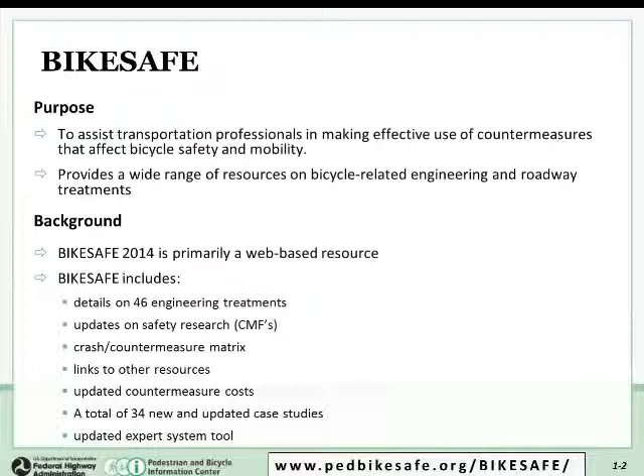So I'll pause here for a second so people have a chance to look at the slide. This covers the purpose that I was discussing about the BIKESAFE guide, and then the 4 different sections. The final section includes case studies to really show the real-world implementation of these countermeasures.

As I mentioned, this is an update of the original BIKESAFE guide, so it includes information on the latest guidelines, and then links to dozens of other helpful web resources. It's intended to be a portal to give you an overview and information on some countermeasures that may be appropriate, and then guide you to other sources of information that may be helpful for selecting that specific countermeasure.

The idea is it's based on best engineering practices, but it's not necessarily a comprehensive list of countermeasures, since the design field is constantly evolving.

There's a couple of companion pieces that we link to throughout the guide that are updated periodically as well. One is information on the safety research for these countermeasures, which is intended to be periodically updated as new research is released. The other piece is a study on how much these countermeasures cost - surveys were done across 40 different states to get a general feel for the cost of these different countermeasures, and that's included with the countermeasure information.

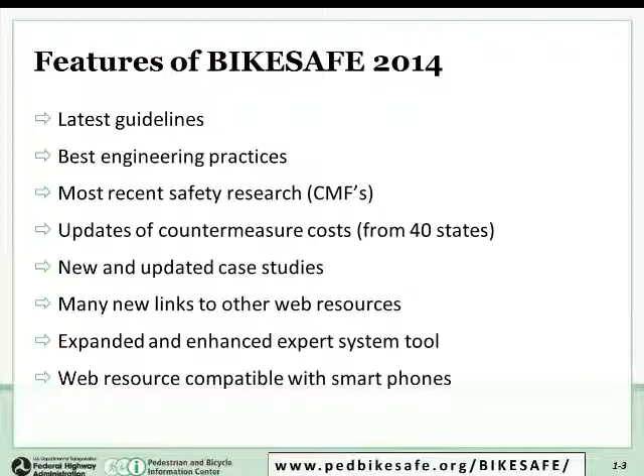So with that and with the background, I turn over to Pete, who will start giving some further information on the first section of BIKESAFE, which is the introduction and background.

Okay, thanks Carl. I assume everyone can hear me. BIKESAFE has a lot of good information in the background, and I'm not going to begin to cover it all, so I'm going to just have 4 slides here that introduce you to the kind of information you'll be able to find in the introduction to BIKESAFE.

First is that everything with BIKESAFE starts and ends with a focus on safety, obviously with safety right in the name, and you'll see that theme throughout, whether we're talking about prioritization or trying to solve different problems. It really always gets back to safety.

This fits in very nicely with some of the other national trends, not only a focus on safety, but really focused on changed outcomes. In other words, we want to be smart about how we spend our time and money and really start reducing both the number of crashes and the severity of crashes. It's also consistent with the new focus on accountability and transparency - why we're doing what we're doing. So it really fits in very nicely with what we're seeing nationally in a lot of communities.

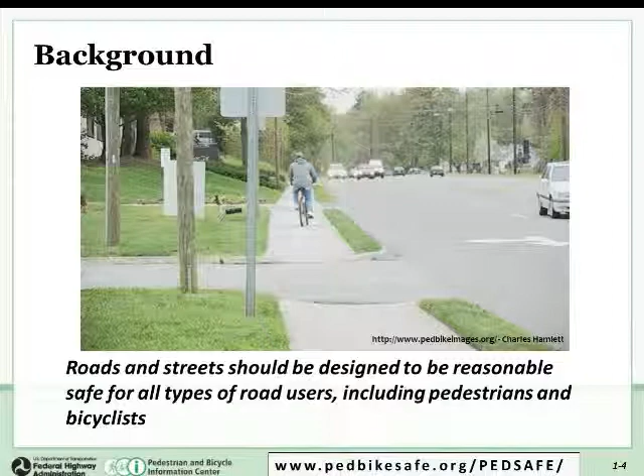Now we'll talk a little bit about land use. What's really good about the guide is it starts to make that link between transportation and land use, noting the direct relationship there. We've all heard the numbers before, but things like the average bike trip is under 4 miles, and 58% of all trips in the United States are less than 2 miles. So it sort of sets it up to suggest that we could capture a lot of these trips by bicycle. And obviously, the question comes up then, why aren't there more bike trips?

The guide notes that higher densities in general result in more bicycling and walking, but just density doesn't always result in more bicycling. There's a lot more to it. It talks about barriers we've created, like freeways and really wide, high-volume arterial streets, creating a situation where the level of comfort for cyclists is very low. You can even have high density, but destinations can still be far away. Quite often we have very segregated land use, no mixed use, so you could live in a very dense residential area, but that doesn't mean you're close to the destinations you want to go.

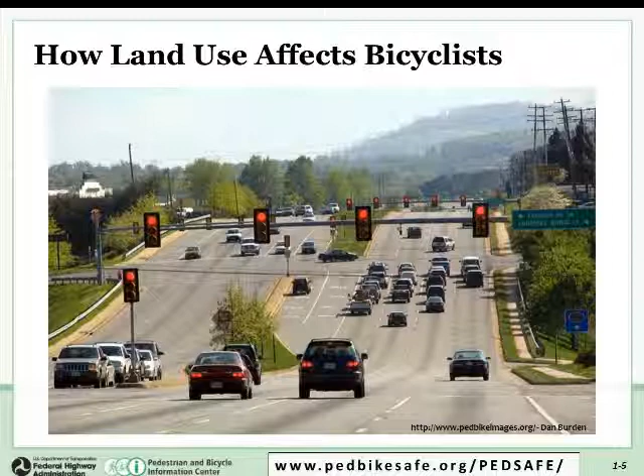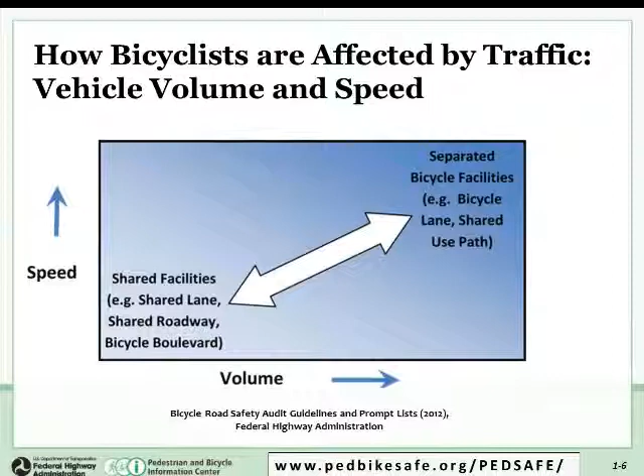So one of the national trends that's really occurring and starting to happen fairly quickly is recognizing the relationship shown on the graph and focusing more on cycle tracks, separated facilities, that kind of thing. But the flip side, of course, is another option: to change the streets, design them for slower speeds - things like road diets or traffic calming. So there can be both creating separation in terms of the bicycle facility, but also things done to the street design to reduce speed. Two different approaches, and that's discussed quite well in BIKESAFE.

So the last piece here is that BIKESAFE also addresses the issue of complete streets, and it builds on the concept of routine accommodation. The idea is, of course, safety and convenience for all users. The basic idea is that you want to do the right thing for every street - it's not a prescription, again. It's really doing what's appropriate for all modes on a given street.

The other thing I like about complete streets is it encourages you to think about the entire right-of-way, not just curb to curb. So it starts looking at sidewalk width, loading and unloading for transit, that kind of thing - really looking at the whole right-of-way. I just checked, and I think there's close to 500 local, regional governments, and 27 states now have adopted some form of a complete streets policy. This is really happening nationally and bringing a different kind of thought process to how we design our street systems.

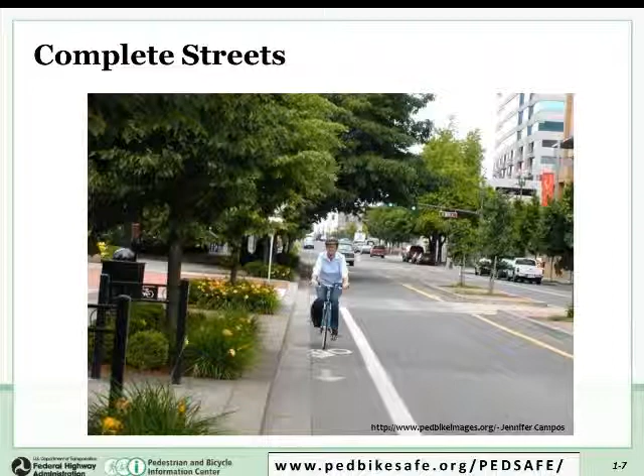So with that, I'm going to turn it back to you, Carl.

Okay, great. Yeah, I think I'm ready to take this from here. So thanks, Pete and Carl.

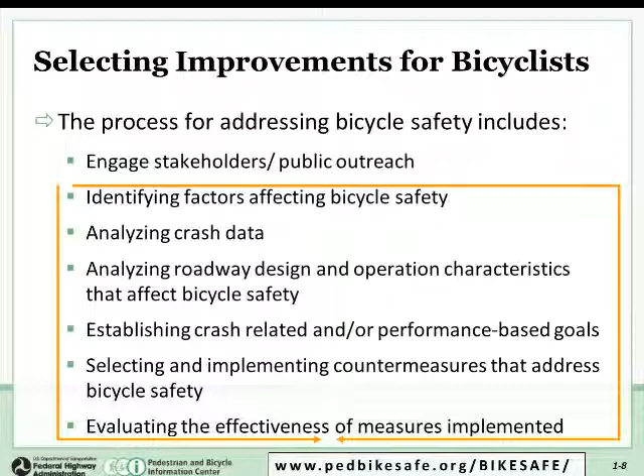Now let's talk about crash data. Analysis of crash data can provide information on where bicyclist crashes occur, when they occur, the characteristics of the victims involved, and other things. One challenge in addressing bicycle safety is that crashes involving cyclists tend to be widely dispersed, making it difficult to target specific locations for improvement. Therefore, rather than focusing only on specific crash locations, common risk factors in crashes along roadways can be targeted. For example, if crash data shows crashes involving cyclists and traffic exiting driveways on a corridor is an issue, rather than targeting just those specific driveways, you would apply a measure to address all the crashes on a corridor showing similar risks.

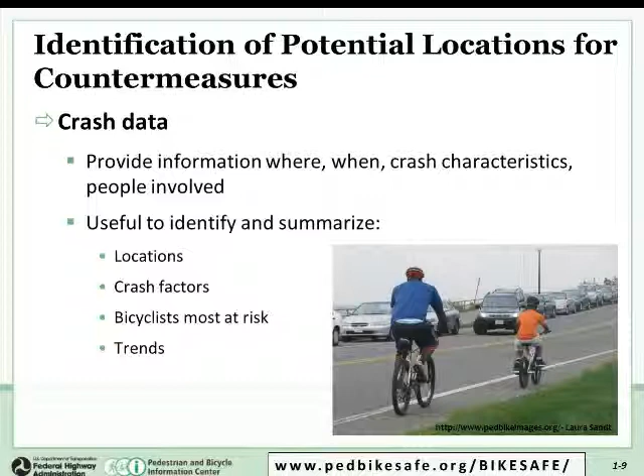There are a lot of tools that can help with typing of crashes. One of those is PBCAT, the Pedestrian and Bicycle Crash Analysis Tool, developed by the Highway Safety Research Center and sponsored by FHWA and NHTSA. It has more than 70 bicyclist crash types categorized into 20 crash typing groups to help analyze trends or commonalities in crashes. Several of these groups have been combined into the 14 BIKESAFE groups for the purposes of selecting treatments, which we'll discuss through today's presentation.

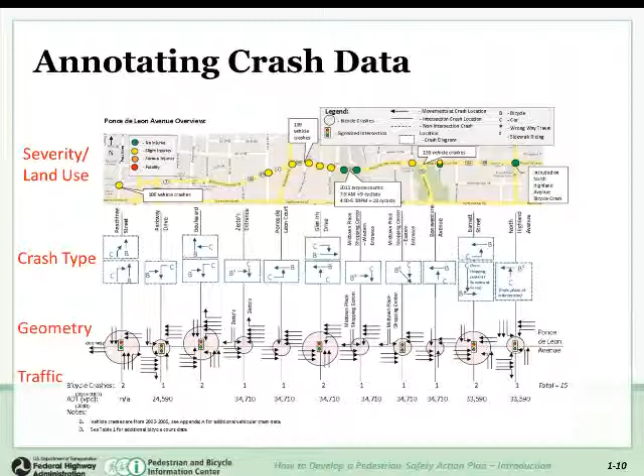Here you see annotating the crash data. When crash data are available, it should be mapped with other information to identify high-risk locations or factors affecting bicycle safety. In the graphic, you can see land use, severity, crash type and crash locations, geometry, and then traffic. Looking at all these factors together, you look for common elements, and that's how you can identify trends.

So what other tools are there that can help identify crashes? Well, one of those are audits and assessments. As we discussed, since bicycle crashes tend to be widely dispersed, mapping may not provide a lot of detailed information in terms of the problems.

So some of the methods that can be employed are using bikeability checklists. PBIC has a bikeability checklist that you can find on their website. You can also conduct road safety audits, a bicycle road safety audit.

Basically, a road safety audit is defined as a formal safety performance evaluation of an existing or future road or intersection by an independent, multidisciplinary team. RSAs are effective because they help engage this diverse team to identify issues by actually riding on the road. That's one of the things suggested through the FHWA guidelines, and you see right here an illustration of the FHWA guidelines available for conducting bike RSAs.

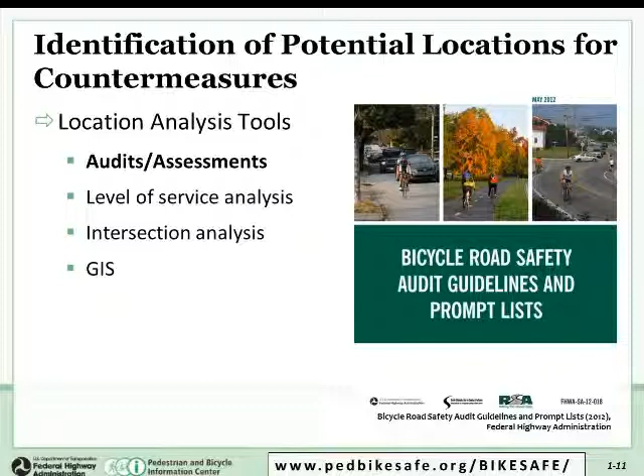Another tool is level of service, and level of service tools can help measure the operational characteristics of bicycle facilities. The 2010 Highway Capacity Manual has probably one of the most well-known methodologies for calculating bicycle level of service, and it's based off of bicycle operations as well as perceived user safety.

That's kind of a newer element added in the 2010 version of the HCM. If you click, you'll see there are levels of service appearing. One of the interesting features of the 2010 HCM is that it combines link level of service—that's the link between two intersecting streets—and intersection level of service, to provide a segment level of service.

Now, a lot of agencies haven't been using this. They're continuing to use the link level of service, which is the section between two intersecting roads.

But there are other methodologies beyond this Highway Capacity Manual methodology, such as Florida DOT's quality level of service model, and there's a bicycle level of stress model, just to name a few. But the link level of service models seem to be much more widely used by agencies.

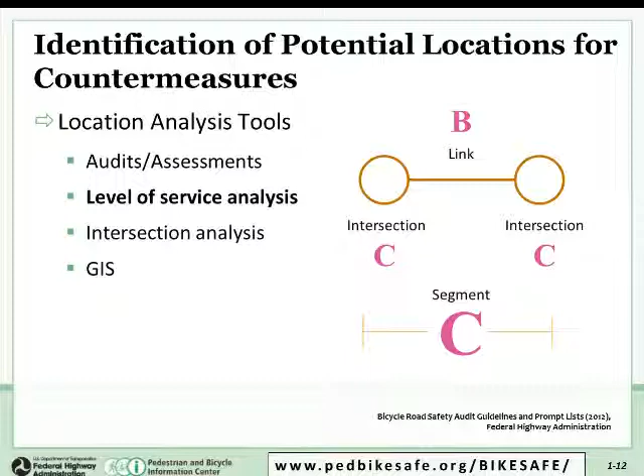Since you do have that gap, intersection analysis tools can be employed to help determine safety at intersections. One of these, depicted here on the screen, is the pedestrian bicycle safety indices. Those were developed by the Highway Safety Research Center and sponsored by FHWA. Basically, they're determined by calculating a separate value for pedestrian bicycle crash potential on each approach to an intersection. The data required to calculate these are typically readily available, making it an easy-to-use assessment tool.

Some of the things fed into the model are traffic speed, traffic volume, roadway width—which is really a number of lanes—traffic control, and other intersection characteristics. These can be used to help provide a relative assessment for safety at intersections and help prioritize improvements.

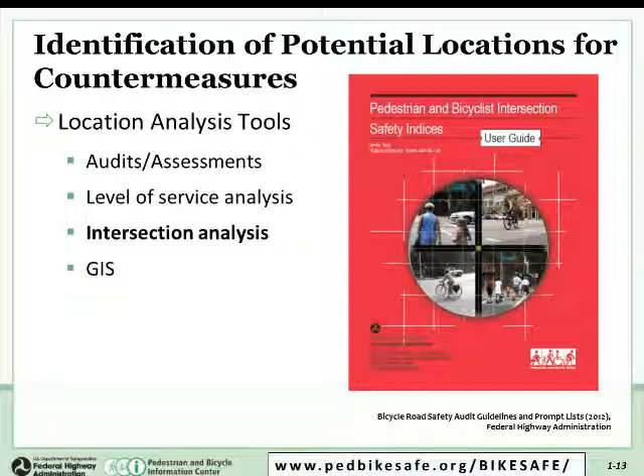All this can be pulled together by using geographic information systems software. You can see here there are a few things illustrated. If you click through, you'll see ISI is the Intersection Safety Index, which can be color-coded by severity. Crashes—you see there are icons for bicycle crashes.

Next, you'll see level of service—the roadway can be color-coded so you know the level of service on links. Then you can have inventory too of off-road facilities and gaps in the bicycling network. So you look at all those things together, and where there's a combination of those different factors, those are your critical areas where you want to prioritize improvements.

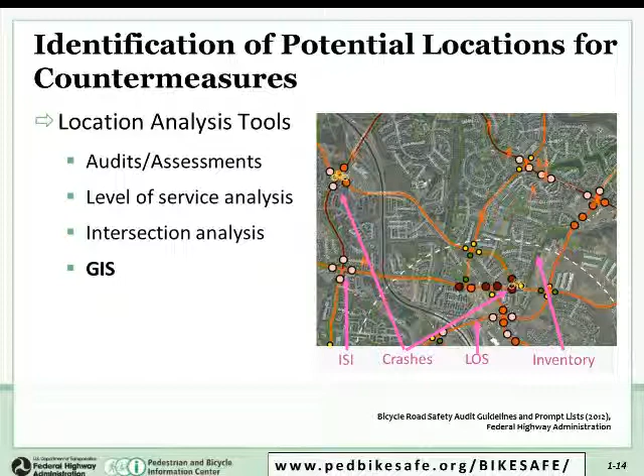This is an excerpt from BIKESAFE that shows the crash type matrix. Down the side are the crash types you might have, and the columns are shared roadway, on-road bike facilities, intersection treatments, etc.—the 8 categories of countermeasures in BIKESAFE where you can find the countermeasures.

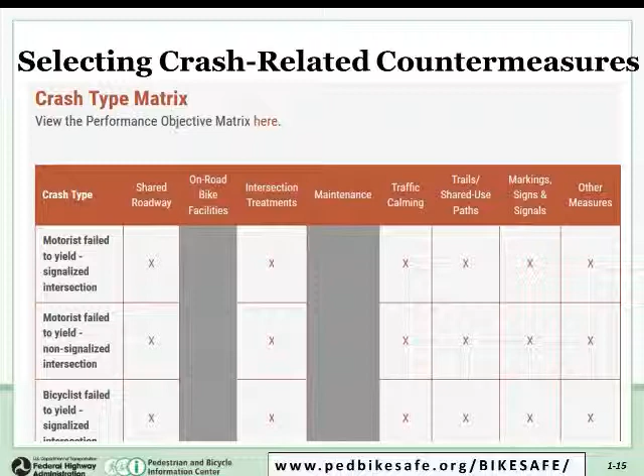Just a little side note here—my son was looking at me reviewing this last night, and he goes, "Dad, are you playing Minecraft?"

So this has nothing to do with a game here, but it's a matrix that shows the locations where there's an X—that's where those crash types would be addressed by that specific countermeasure category, and where it's a grayed-out cell, that's where it wouldn't be addressed.

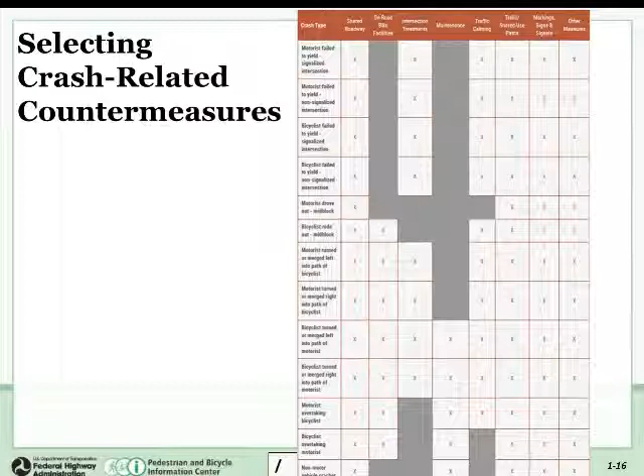So next, and this is just what I had briefly mentioned before. This is the performance objective matrix, which has again the 8 categories of countermeasures. And then on the rows, the objective type - instead of being crash issues, these are the performance objectives that you could achieve by applying countermeasures in one of these 8 categories.

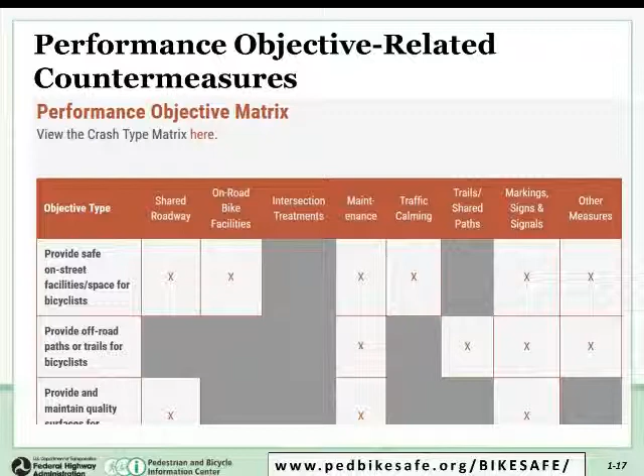If you go to the next slide, you just see the whole matrix. So that's kind of a brief rundown in terms of how you use BIKESAFE to find or solve some of the issues that you might have in addressing bicycling safety. And next, I think I'll pass it back to Carl to talk about some of the specific countermeasures.

Yeah, thanks, Dan. So that's a great overview of how to identify where these problem areas may be, and understanding a bit more about the kind of root causes of bicycle safety and how we can address those.

So given the constraints of just one webinar, it's certainly a big topic, and so I'll definitely encourage you to go to BIKESAFE itself and read through some of those sections, which provides much more discussion on the topic.

But the next section here are the countermeasures themselves, and as I mentioned at the start, there are 46 different, mostly engineering but also some education enforcement countermeasures used within BIKESAFE, and they're categorized within 8 sections, and that's what we'll be presenting on here.

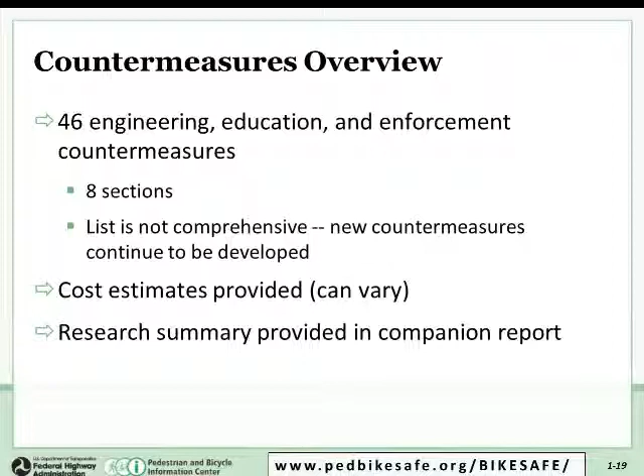And so now Pete and then Dan will talk us through these different eight different sections of countermeasures. Okay, thanks, Carl. Yeah, as was mentioned, the countermeasures, the 46 countermeasures, are grouped into 8 different areas, and one of them is the shared roadway.

And I'm not going to go through this whole list. You'll see the 2 highlighted ones there, parking treatments and driveway improvements. I'm just going to touch base on those 2 as an example of the kind of information that you'll find in BIKESAFE. So the first one here is on parking treatments, if we could.

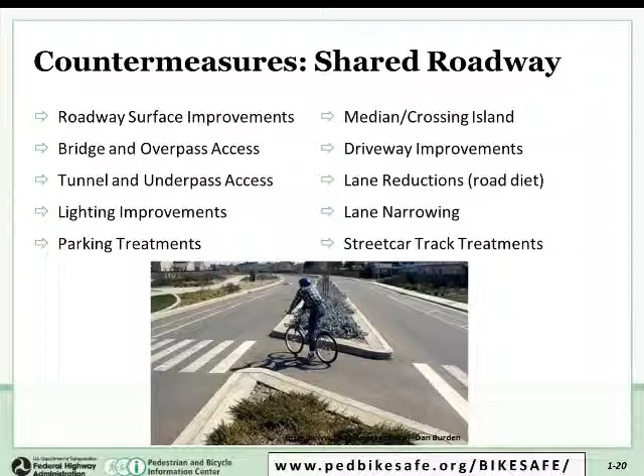Now, again, this is a very CliffsNotes version of what you'll actually find in BIKESAFE. But the basic pieces are: it starts with a description, and quite often it has a picture, and also - not shown here - but very often there's also a sketch or drawing. In this case, it shows a before-and-after cross-section to give you a sense of what you might be doing to create this back-in angle parking.

So it talks about the purpose, and you can see here it talks about conflicts between bicyclists and parking, but also people backing out and not being able to see. It also gets into some of the other pros and cons of this kind of treatment. For example, if you're putting something in the trunk, you're on the sidewalk, or if kids are getting out of a car, the door opens and they can only go toward the sidewalk. So it goes through some of the considerations.

And then it has a little bit on cost, and it's a wide range, as you can imagine. Quite often the numbers given, because each situation is so different, give you a sense of scale related to cost. And then considerations - purposely we did not use words like exceptions or things like that. This is really just the thinking part. Sometimes we say it's bringing good engineering judgment, good planning judgment, if you will, to the thinking. And again, it's where you can have that discussion and thought process about some of the pros and cons. So you can see here some of them are listed - this is just a little sampling of the actual BIKESAFE.

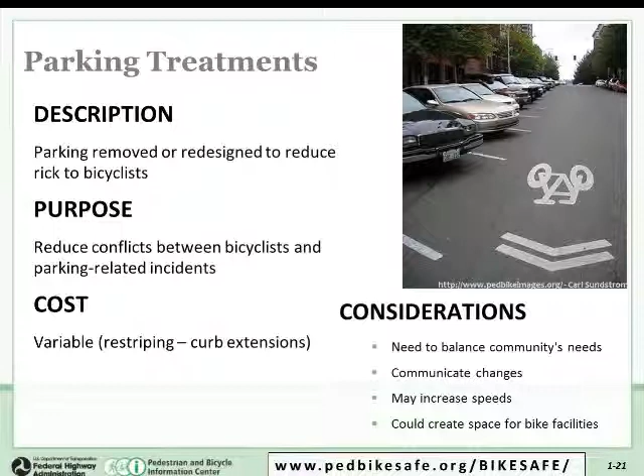On this particular treatment, there's going to be a lot more information on considerations as well. So the next one...

This next one is on driveway improvements, alluded to earlier. This is one of those treatments you can do on a whole corridor. Because crashes quite often occur in patterns or corridors rather than at a single location, this is the kind of thing you could do for an entire corridor—some access management, consolidating driveways. The description and purpose focus on reducing the number of conflict points, as you can see with the little X's showing reduced conflict points between the left and right sides.

It also discusses costs and considerations. Obviously, something like this can be great for reducing the number of conflicts, but there could also be other issues—for example, if you add a median and people can't make left turns anymore to access businesses. So there are a lot of different considerations. What's nice is that it walks you through all these different things, helping you have a thoughtful conversation about what you're proposing to do.

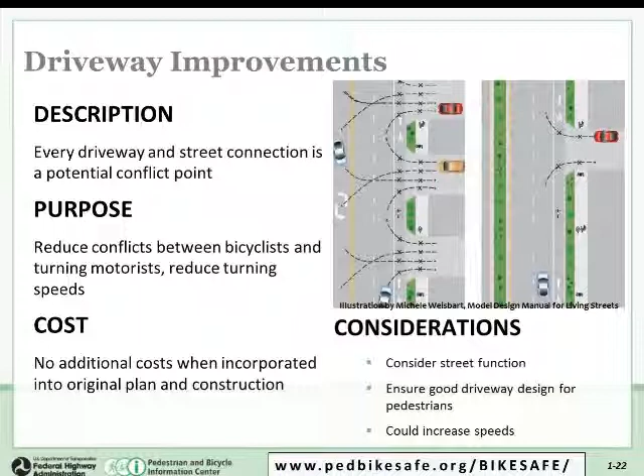Then the next area—again, we're just grouping the countermeasures. A second one is on-road facilities, and you can see the list here of some of the different kinds of on-road facilities offered in BIKESAFE.

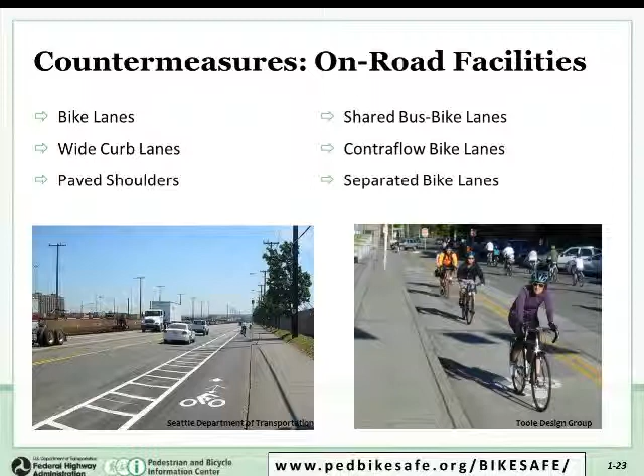Why don't we just go to the next one—I'll give another example. This next slide shows separated bike lanes, so you can see the picture here. A little while ago I talked about the relationship between average daily traffic, speed, and number of lanes, and needing more separation as those things go up. A lot of times this separation looks like this—it's like a one-way cycle track, or a separated bike lane, or a buffered bike lane. Different words are used, but I think you look at the picture and get the idea.

Again, it describes the purpose, talks about the cost, and then the considerations. Obviously there are issues here like visibility and driveway crossings. When you come to an intersection, you may need bike signal heads—they may be appropriate. So it really starts to walk you through all the considerations and helps with that thinking process.

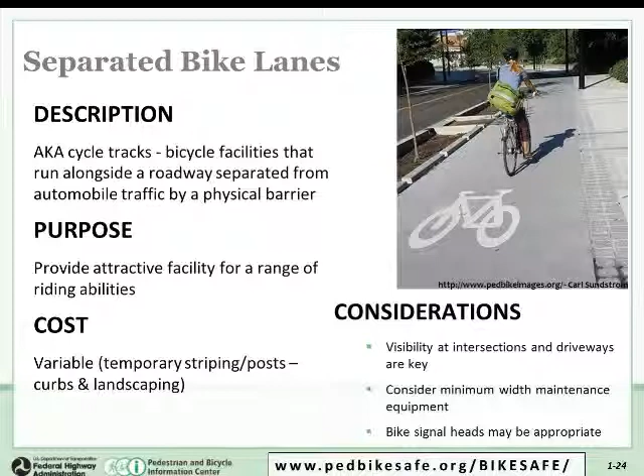So really focusing on maintenance is critical to safety. It talks about short-term maintenance—another way to say it is annual maintenance—things like sweeping, cutting back vegetation, filling cracks and potholes. Then there's major maintenance, like you see on the right here, replacing a larger piece of a trail that needed replacement. It discusses this in a very good way, showing how important it is for overall safety in your community.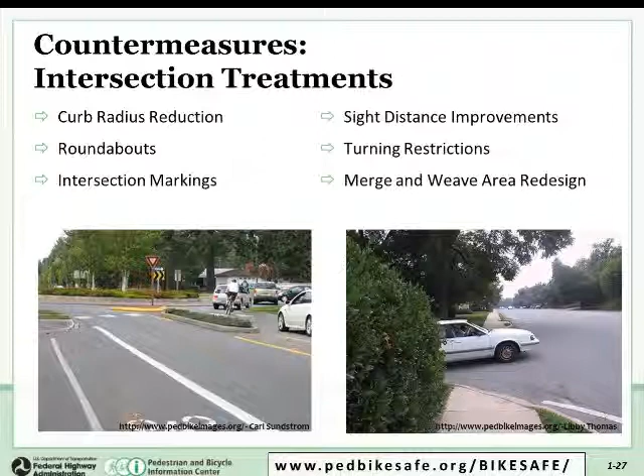Pete described the layout of the information for each of these countermeasures, with description and purpose just orienting people to what we're talking about. So for curb radius reduction, we're talking about motor vehicles making high-speed turns, which pose problems for bicyclists as well as pedestrians. The higher speed turns are typically made possible by wide corner radii, which can also create portions of undefined space on the roadway. Let's look at some considerations.

Curb radii are established based on the anticipated design vehicle of the roadway - what type of vehicle is anticipated to use that facility, such as a bus, a truck, or emergency vehicles. These are usually set by local design standards and policies, which often determine the curb radius in an intersection, but there's an opportunity to revisit those policies based on changes in travel patterns, shifting travel modes like more bicyclists or pedestrians, and redevelopment. So one of the recommendations in BIKESAFE is to use the smallest practical curb radii that can accommodate all road users.

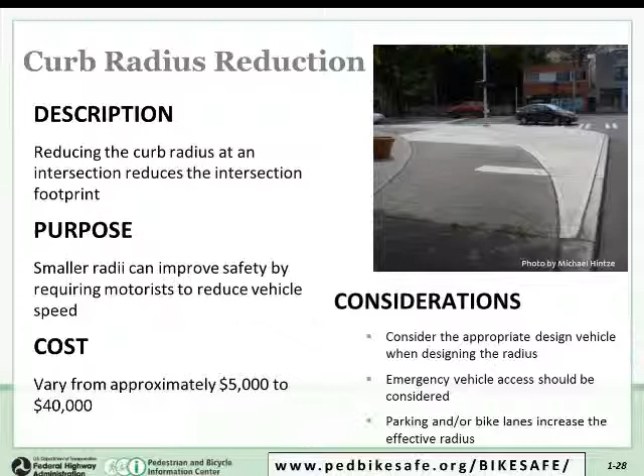All right, so let's go to the next one. Intersection marking is a pretty broad category because there are quite a few things that fall under this. Basically, a large percentage of crashes and conflicts between bicyclists and motor vehicles occur at intersections.

Intersection pavement markings include things such as dashed lines, the use of green-colored pavement as shown in the photo here, and other kinds of markings such as the experimental bike box. All these things can be applied to improve the awareness and visibility of intersections, and they're all discussed in the context of providing intersection markings.

A few examples: dashed lines are used to indicate the proper path of a bicyclist through an intersection where a through bike movement overlaps with the right turn lane. Green-colored pavement may be used for similar crossing paths and weaving areas, with the purpose of increasing awareness and safe behaviors by both cyclists and motorists.

In 2011, the FHWA issued an interim approval for the use of green-colored pavement within the marked bike lane and where bike lanes continue through intersections. It should be noted that you see other colors too, but those other colors were not approved for use - green is the color that the FHWA has issued.

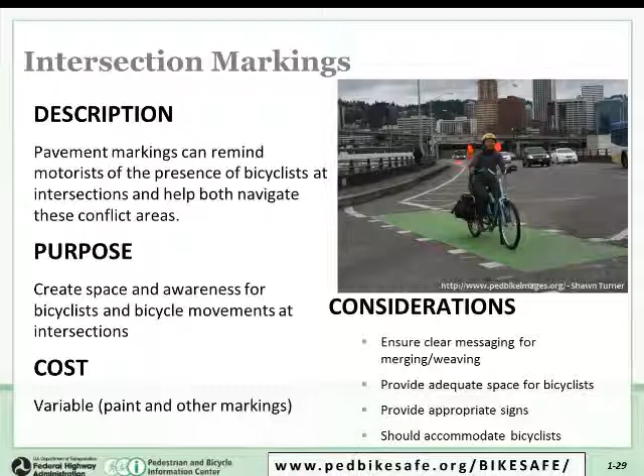Okay, next, another category is trails and shared use paths. You can see there are three different categories: separate shared use paths, path intersection treatments, and share the path treatments. I'll touch on a few of these. Separate shared use paths are paved bidirectional pathways.

Ideally, they'll follow a separate course from the roadway and have very few crossing roadways, because paths immediately adjacent to roadways may cross numerous intersecting roads and driveways that create conflicts for path users. There's information on the key features you want to see in a separated shared use path.

Path intersection treatments are a big one. Intersections between roadways and shared use paths may present challenges, especially since you're dealing with a wide range of bicyclists as well as slower moving pedestrians, and they all need to be accommodated. It provides guidance on where you can find basic information - one source is the AASHTO Bicycle Facilities Guide, which provides design guidelines for path intersection crossings. One of the fundamental principles of those crossings is that a traffic control device, either a sign or signal, should be installed at all pathway intersections and should send a clear message to path and roadway users alike. So that's just touching on some information available for shared use paths.

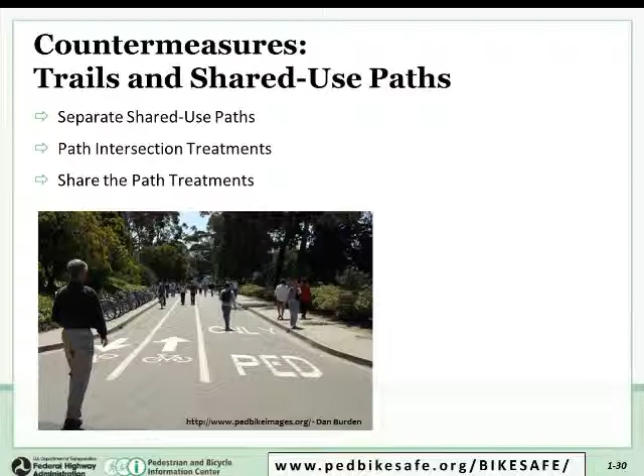Next, we have the category of markings, signs and signals. As you can see, there's 8 measures in this, so it's a pretty hefty portion of the BIKESAFE manual, and we'll focus on a couple of them. Go ahead to the next slide, please.

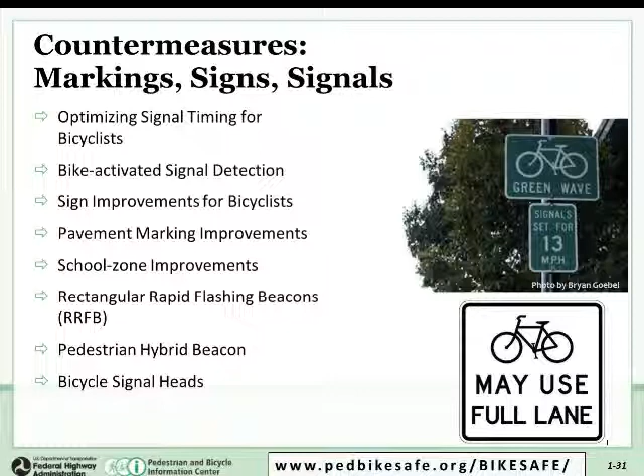Starting with bike-activated signal detection. At signalized intersections that require users to be detected to call in the green phase, detection should be present to accommodate bicyclists. Properly designed detection can help deter incidences of red light running and other undesired behaviors by reducing delay and waiting time in signalized intersections.

There's 2 basic types covered in BIKESAFE of detection: active and passive. Active detection requires the user to activate the signal phase through a push button. However, you shouldn't expect bicyclists to leave the roadway to actuate that signal, so for that reason passive detection is often preferred. Passive detection is when a signal system automatically detects the presence of a user.

The most common method is what's used for vehicle detection technology predominantly, and that's the loop detector, which you can see pictured on this slide. That could be used to service bicycles as well. Additional detection devices are also discussed in BIKESAFE, including video detection, microwave detection, and these are things that are being continually updated. So this is one of those dynamic areas where technology is really moving very rapidly.

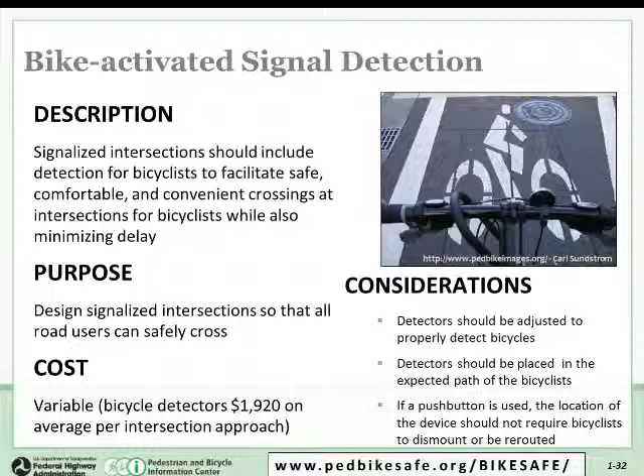Okay, next. So bicycle signal heads. Bicycle signal heads are an additional traffic control device installed in a signalized intersection to provide guidance and right-of-way to control bicyclists only. Bicycle signal heads can be the standard signal lenses that you see in the roadway or lenses with bicycle signals, and this photo here kind of shows both of them.

In the foreground, that's the bicycle symbol signal head, and in the background you see the sign that says bike signal, and that's probably your standard lens right there. The 2012 AASHTO guide for development of bicycle facilities indicates that the 3-lens use that you see in the background is applicable.

FHWA has issued an interim approval on the optional use of bicycle signal heads with yellow, green, and red bicycle symbols, which is the picture in the foreground.

Bicycle signals are useful at intersections with bicycle-specific movements, such as contraflow bike lanes or separated bike lanes, to indicate the right-of-way for the separate bicycle movement. They're also useful in intersections where bicycle movements need to be separated from conflicting vehicular movements, and providing bicyclists their own phase would be helpful.

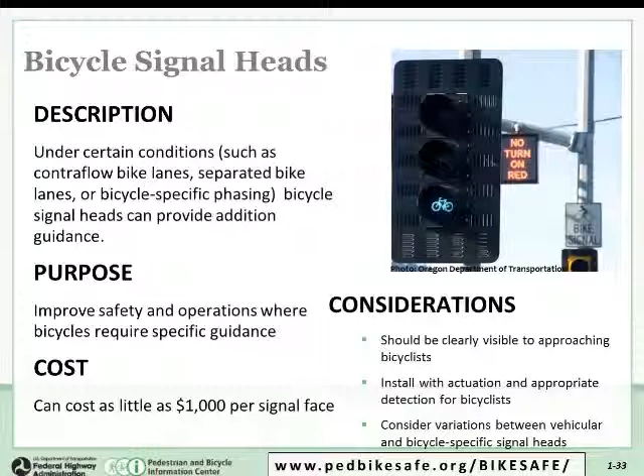Okay. Oops, we're moving around here. Yeah, sorry about that, it dropped out of the PowerPoint. Let's see if we're back in. Are we back in? Yep, I can see it.

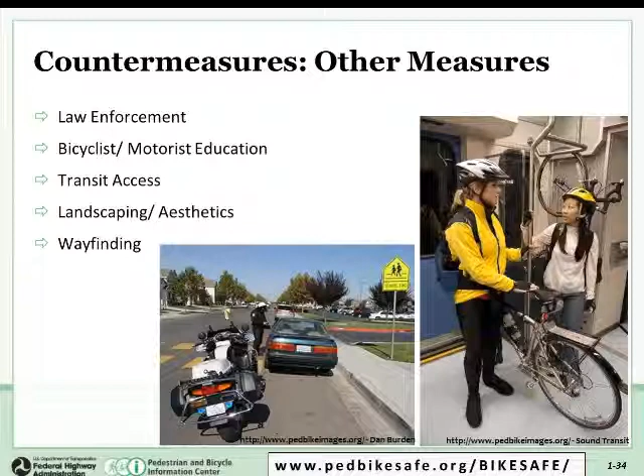So that's a really quick run-through of some of these countermeasures. Again, as you can see, there's quite a few of them, and there's quite a bit of material that relates to these countermeasures that's provided through BIKESAFE. So I'll turn it back to Carl, I believe.

Yeah, so following on the Countermeasures overview there, as Dan pointed out, there are quite a few countermeasures in there, and a lot of good information and descriptions of each countermeasure and whether or not it may be applicable. So just to give everyone a brief overview of the website and some of the different ways to arrive at the countermeasures themselves.

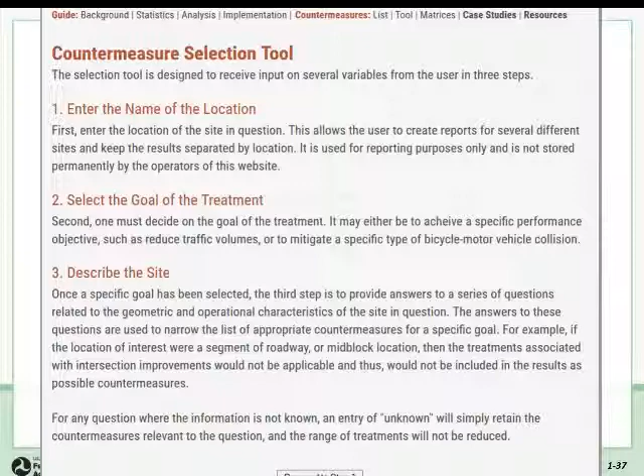It really starts by having you enter the location and some basic safety problems and site conditions, just to get a better sense of what the problem is that you're trying to address. So there's three steps to the process where you name the location, you select your goal of treatment, whether that's trying to reduce traffic speeds, volumes, maybe you're having a problem with a specific crash type. That type of information is in there, and then you describe the site itself, whether it's traffic volumes, speeds, what's the land use context. All that goes into this selection tool.

So just as an example here, you can see this example is asking the crash type is to provide safe on-street facilities, space for bicyclists. And in this case, we selected it as an urban location with the principal arterial of medium speed, 31 to 44 miles an hour, etc.

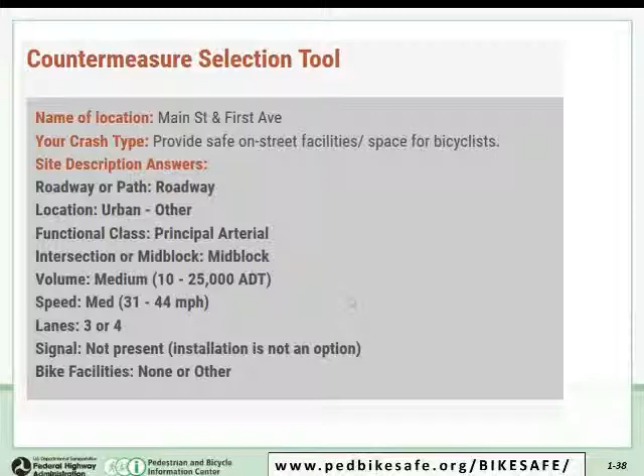And what comes out of this tool is this sort of short list, this whittling down of all the countermeasures into ones that may be appropriate for your situation. So there's a bunch of candidate treatment options here. Since I selected one about creating space for bicyclists, this list, as you might expect, would be quite long. In other cases, the list would be much shorter. But you can see here that these are all the different countermeasures that came up from the expert system, and then you can click on each one to read more about that specific countermeasure.

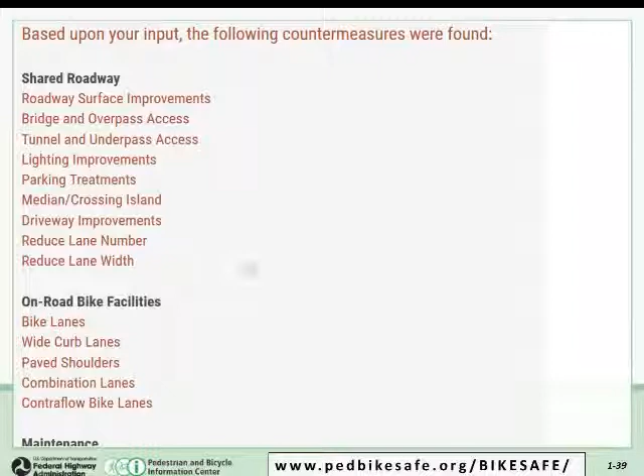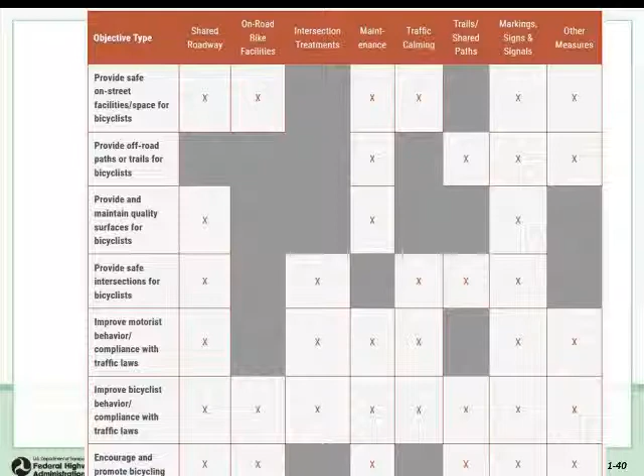Another way to access the countermeasures is this matrix that Dan showed earlier. So you can look here at something like shared roadway and provide safe on-street facilities for bicyclists. If you click on that, it'll pull up all the countermeasures that may be appropriate for that given condition. So the two different matrices that are provided are another way to get at these countermeasures and kind of pull that list down a little bit.

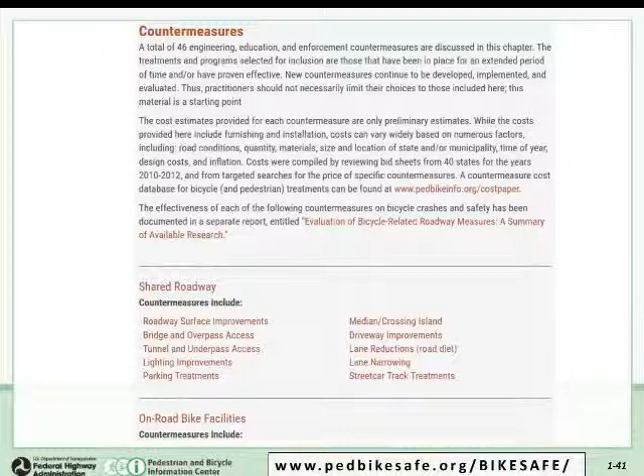Finally, you can just browse. So this shows those 8 different groupings on the website. Shared roadway is presented here, and again, you can just click on the countermeasures directly if you just want to browse all the countermeasures that are provided in BIKESAFE. So there's several different ways that you may want to approach the use of BIKESAFE and addressing your specific crash problems and concerns.

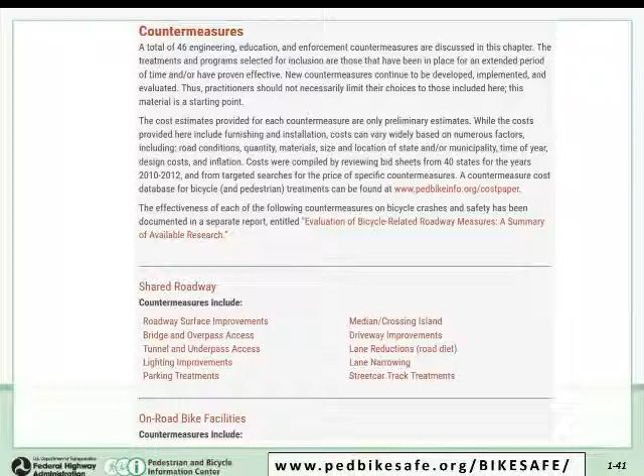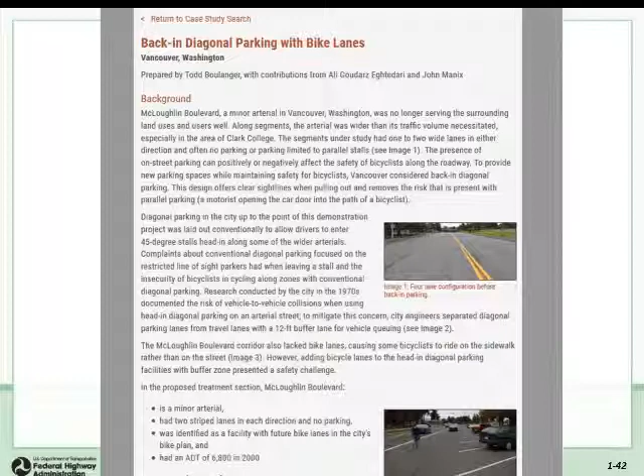And then finally, this is only briefly mentioned, but there are quite a few case studies, and so these case studies are linked from the countermeasures themselves and can also be browsed directly on the website. If you just click on the case studies link, you can browse based on crash type or location, and that will pull up some really great, pretty in-depth case studies on how some of these countermeasures were used and any sort of data and information that we have on how successful that countermeasure was for that given condition.

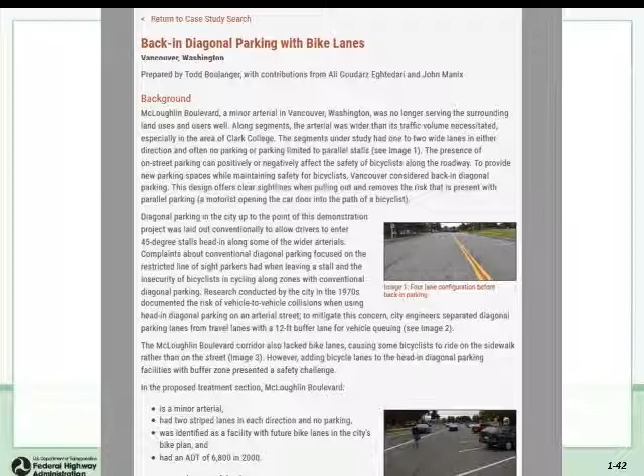And then finally, once you've gone through this process and identified a countermeasure, you need to have the right implementation strategy. So I'll let Pete finish out this section, the final section here on implementation of the countermeasures in BIKESAFE. Yeah, thanks.

One of the things that BikeSafe does a very good job of is it doesn't just leave you with the countermeasures, but it gives you a lot of ideas for actual implementation.

The first area it covers is how do you set priorities, and you'll see safety on the top of the list. It talks about understanding what types of crashes are occurring, where they're occurring, and then applying the appropriate countermeasures. It's a way of letting you pick all the locations and narrowing them down to the ones you want to focus on.

It also talks about accessibility, a theme we hear a lot when doing bicycle planning. A lot of times it has to do with creating a connected network, connecting greenways, connecting corridors, being able to get to destinations. That can be a way, as you do implementation, of prioritizing where you want to make your improvements.

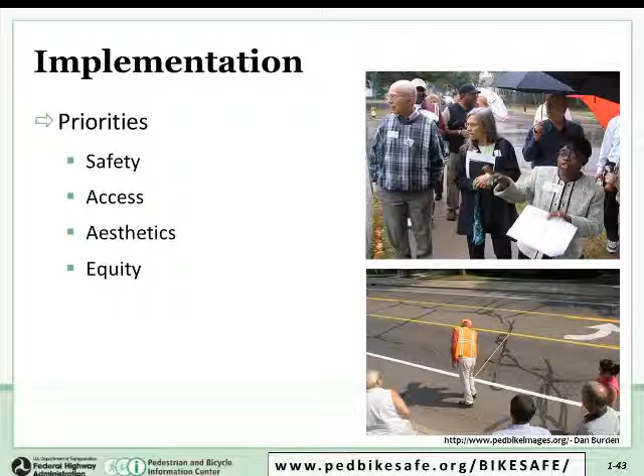This next slide talks a little bit about funding. I'm not going to spend a lot of time on it, and certainly not going through the list of funding sources right now, but just a couple things.

One is the importance of public involvement and a consensus on priorities. Quite often funding becomes an issue when there's disagreement, and the more there's a community consensus that something is really important to be done, the more opportunity there is to find the funds to work on those particular projects.

It also talks about the fact that funding is hard work. It takes a lot of dedication. It's not a magic bullet, but we do know that a lot of communities are finding funds for both bicycle and walking projects. What I always find interesting too is it's not necessarily related to the wealth of the community. It really has to do more with your priorities and community consensus and deciding where to spend your funds.

Another common denominator, an ingredient of success, is that most projects have a spark plug, and by this I mean a person or two that makes things happen. It talks about how you nurture those spark plug type people and how you bring them along, noting that every trail, every park, all the wonderful good things in your community usually had one or two people who were really pushing it and making it happen.

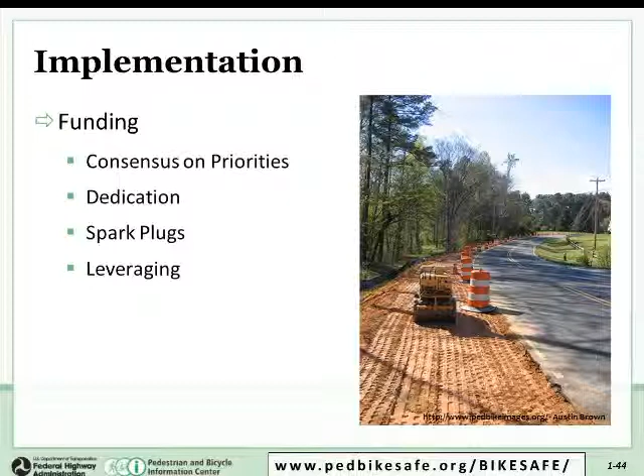It talks about, for example, resurfacing projects. When a street is resurfaced, there's an opportunity to do the striping differently and get those bike lanes in, really looking at all capital projects for opportunities for piggybacking, and even suggesting looking at where there's public and private utilities planned in the future. Anything that needs a linear corridor is an opportunity to build a sidewalk, build a trail, to do something to improve both bicycling and walking.

Another area that it discusses is developer requirements. Quite often this is a little more on the pedestrian side, things like sidewalks, but also some of the trade-offs. For example, maybe you can go with narrower streets and have sidewalks, and it still takes up that same amount of space, and maybe even cheaper.

It also talks about annual programs, the importance of having small wins in your community, things that are visible and create momentum. For example, you could have a spot trail replacement program, sidewalk replacement program, curb ramp program, annual programs to replace signs, a spot improvement program where people send in requests, or a pothole program. The focus is always to be responsive, build momentum and public support, and the focus is always on safety.